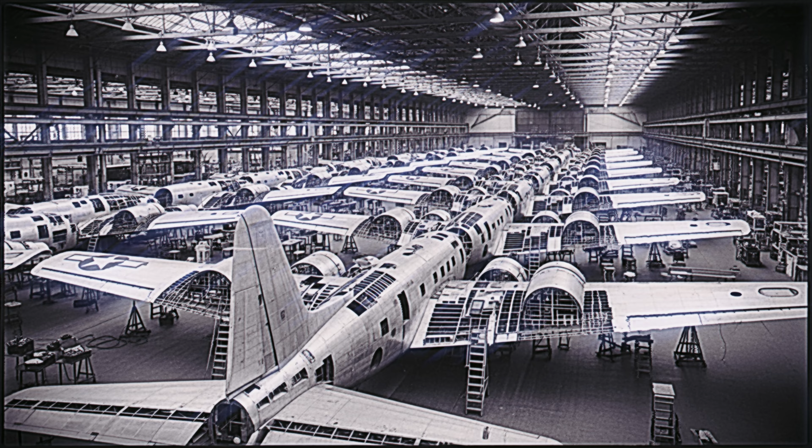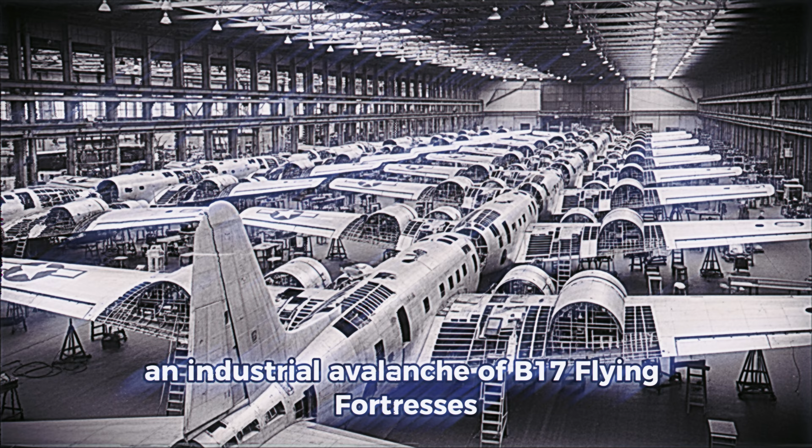In the first bitter weeks of 1942, Boeing's Plant 2 in Seattle was supposed to be a thunderstorm, an industrial avalanche of B-17 Flying Fortresses that would one day darken the skies over Nazi Germany. Instead, the massive assembly hall stood frozen in a suffocating stillness. 63 skeletal bombers, nothing but aluminum ribs and unfinished wings, sat motionless under the factory lights, each one a monument to a promise America was failing to keep.

The Army Air Forces had ordered 3,615 bombers for that year. By mid-January, Boeing had delivered 9, a single digit. General Henry Hap Arnold was not disappointed. He was incandescent. Behind closed doors, on January 15th, his fury seared through Boeing's executives like acid.

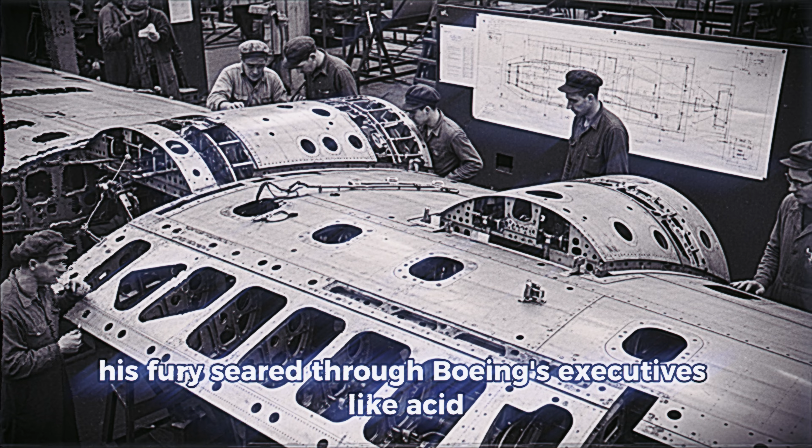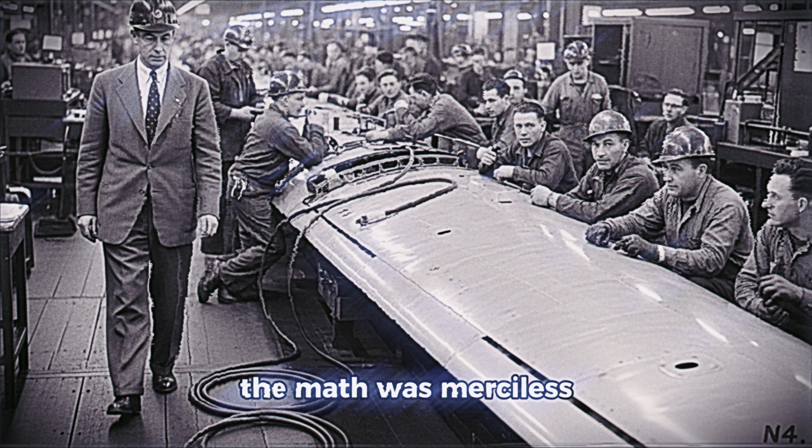Without a fleet of heavy bombers, there could be no strategic air campaign. Without that campaign, the ground war in Europe would devour American lives for years. Every day Boeing failed to deliver was another day the Third Reich gained ground. The math was merciless. And yet, the problem wasn't manpower.

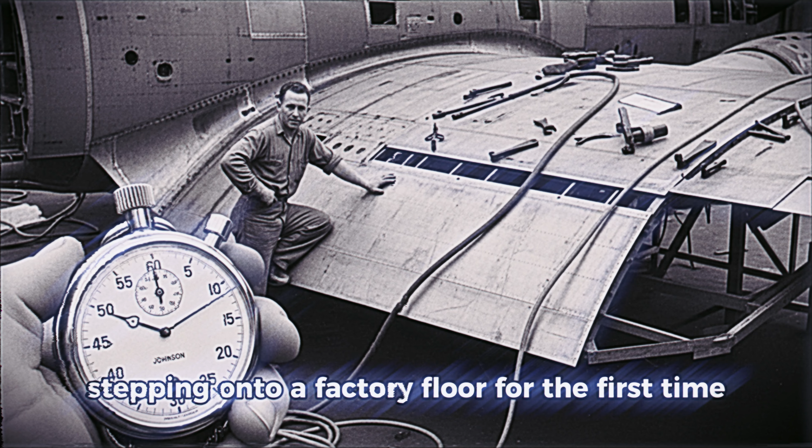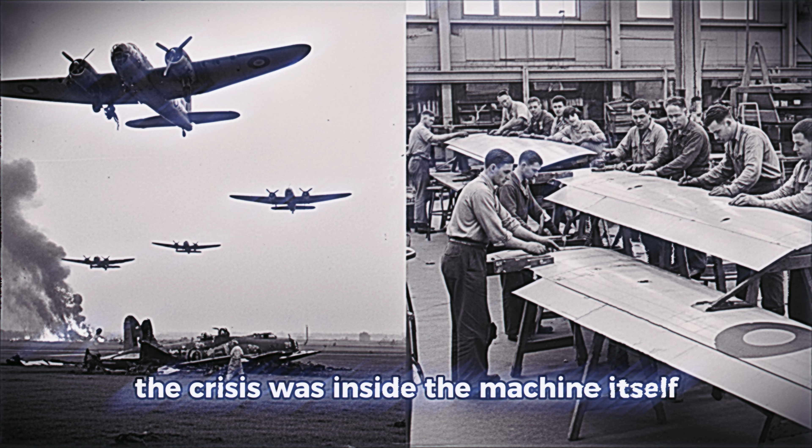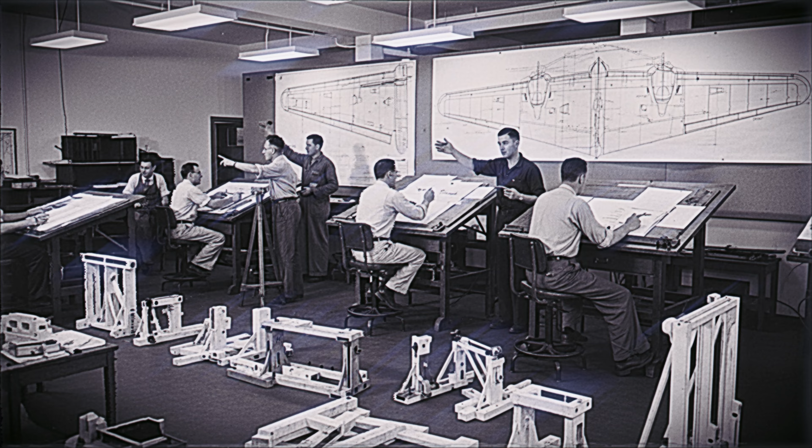Boeing had hired 30,000 workers in 6 months, many of them women stepping onto a factory floor for the first time. It wasn't materials. Mountains of aluminum from Alcoa sat waiting to be shaped. The crisis was inside the machine itself. The B-17 was too complex for the world that needed it. Each bomber was a 140,000-piece puzzle. Each wing demanded more than 12,000 rivets. The established methods of aircraft construction, methods perfectly suited for smaller, simpler planes, collapsed against this new reality.

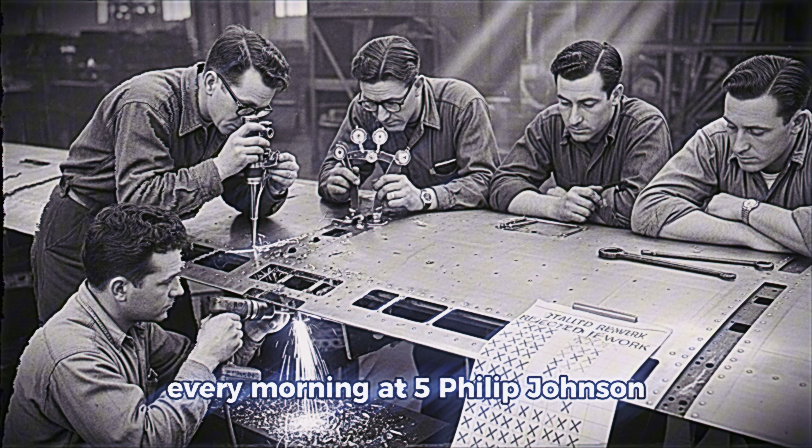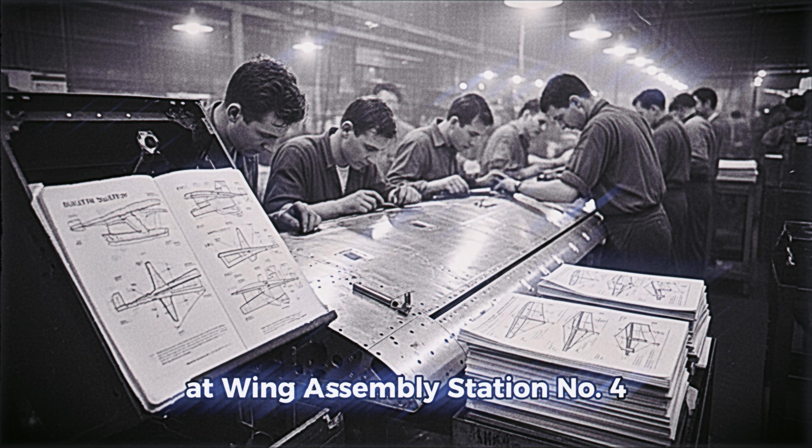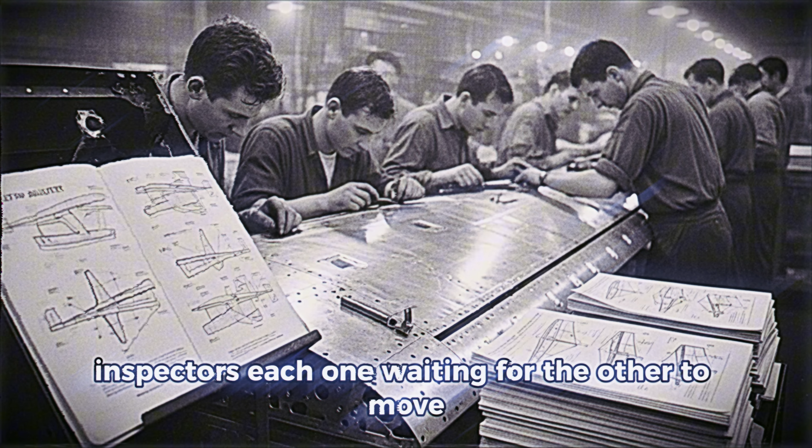Every morning at 5, Philip Johnson, Boeing's head of production, walked the line like a man pacing through a slow-motion catastrophe. At Wing Assembly Station number 4, 17 workers were packed shoulder to shoulder, stumbling over hoses, fighting for the same square foot of space. Riveters, buckers, inspectors, each one waiting for the other to move. A choreography of frustration, a ballet of wasted time. Johnson had timed it himself, more than 20 hours to finish a single wing.

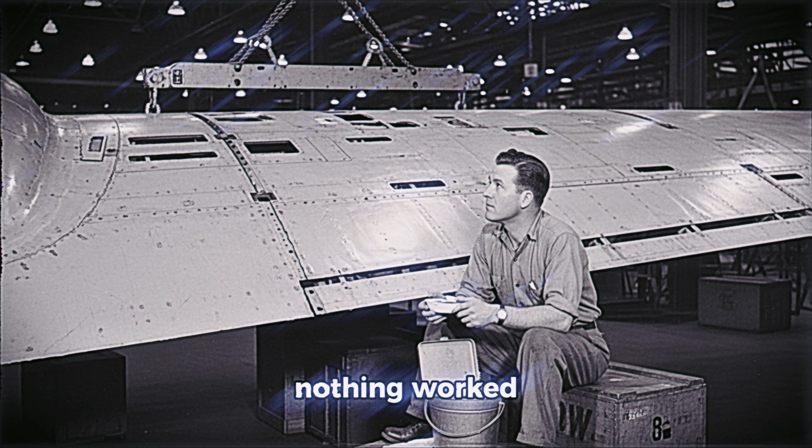Meanwhile, over Europe, the Royal Air Force was losing bombers faster than Boeing could build them. Every hour lost in Seattle meant another blackened crater in England, another Allied ship sunk in the Atlantic, another German factory untouched in the Ruhr. The paralysis wasn't just costing time, it was costing lives. Engineers tried everything: new access ports, custom jigs, smaller crews, bigger crews. Nothing worked. The bottleneck was baked into the wing's DNA.

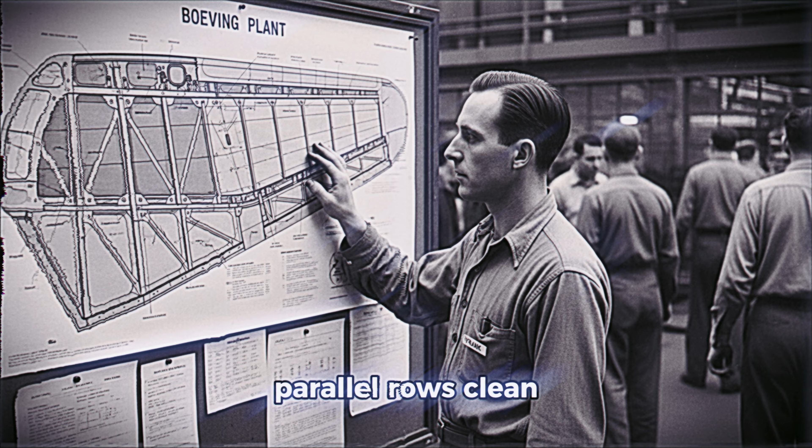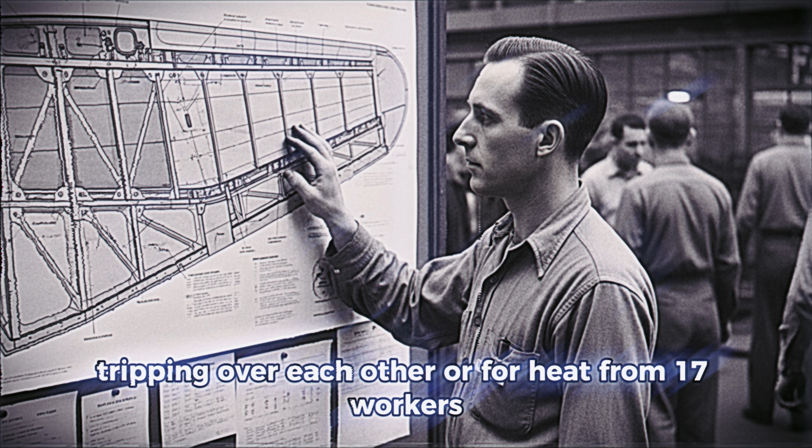The sacred blueprints demanded each rivet line be installed in perfect parallel rows. Clean, predictable, theoretical. But theory didn't account for human bodies tripping over each other, or for heat from 17 workers expanding the metal just enough to misalign thousands of holes. The engineering was flawless. The reality was chaos.

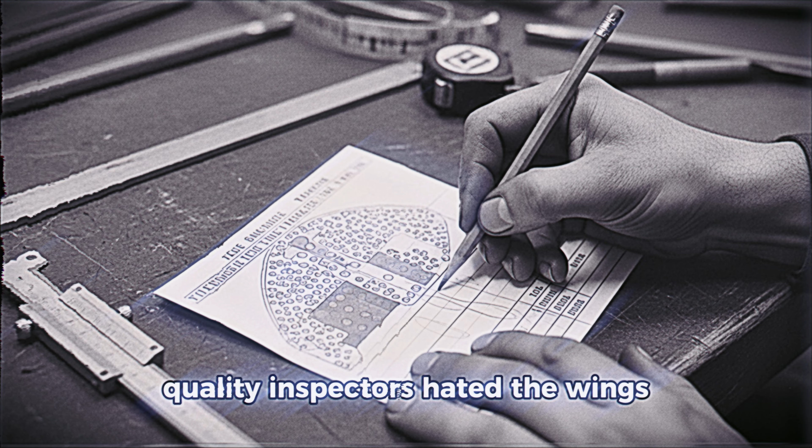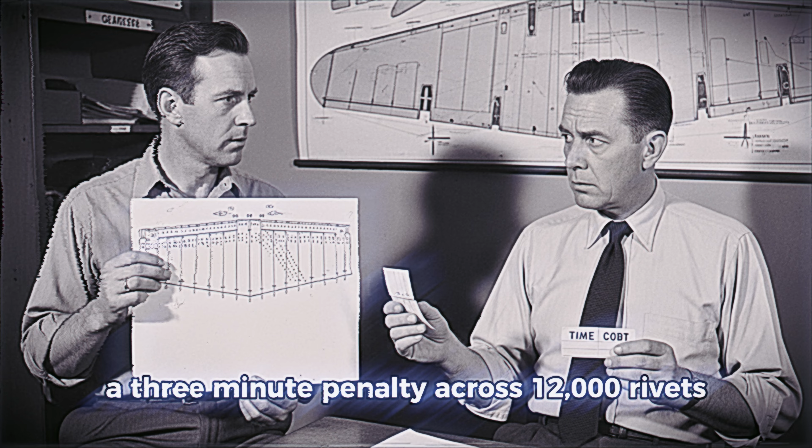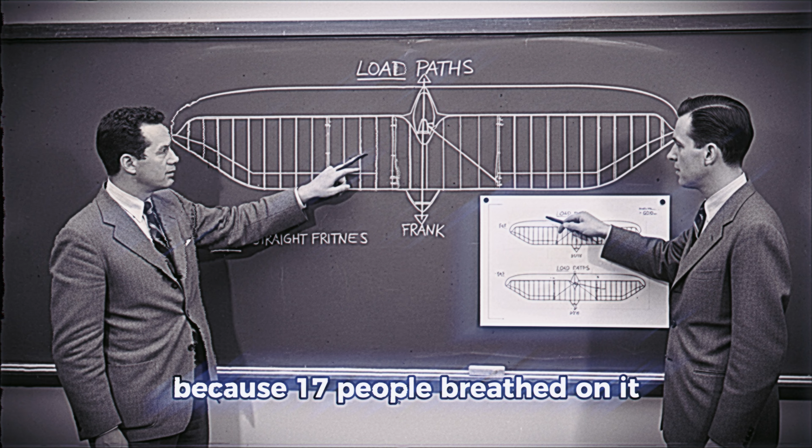Quality inspectors hated the wings. Every 10th rivet had to be checked with a borescope. If they found a flawed rivet, it meant drilling it out, a 3-minute penalty. Across 12,000 rivets, those minutes became wars. No manual mentioned what happened when the metal distorted because 17 people breathed on it for 20 consecutive hours. But that was the world they lived in.

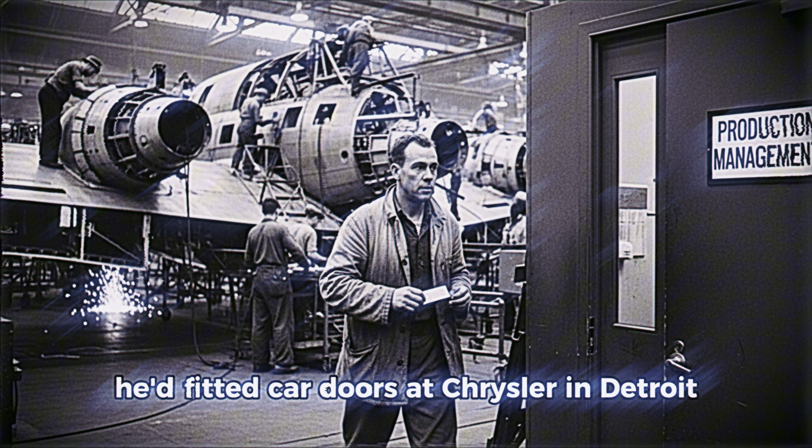And in that world worked a man named Frank Shamansky. He didn't look like someone destined to alter the trajectory of a global war. 5'7", 31 years old. Hands stained black from aluminum dust. Before Pearl Harbor, he'd fitted car doors at Chrysler in Detroit. The kind of repetitive work where your mind wanders, but your hands move like they've known the rhythm forever. Frank joined Boeing's swing shift, working from 4 in the afternoon to midnight.

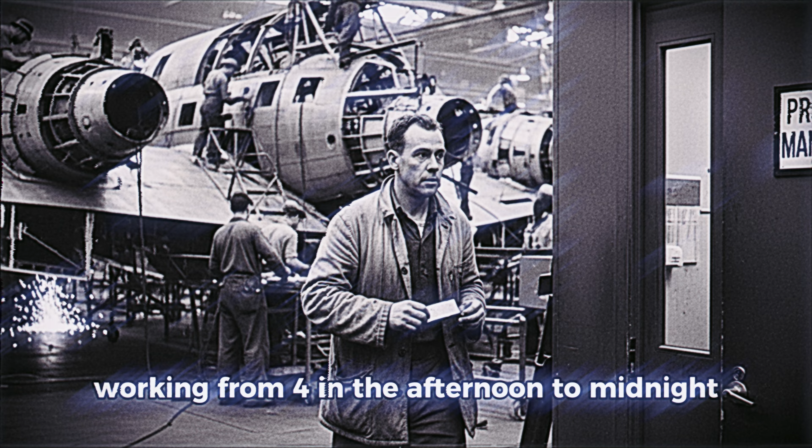And what separated him from the others wasn't speed. It was his gaze. Frank saw the whole system. He saw Jenkins stuck on row 3 because Patterson on row 2 was trapped behind quality control. He saw riveters losing minutes reconnecting hoses. He saw how human exhaustion was quietly sabotaging American air power.

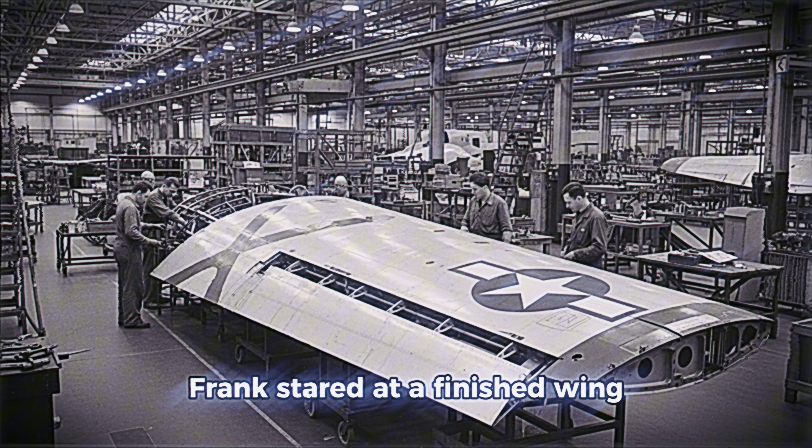On February 4th, while eating his sandwich on a crate, Frank stared at a finished wing being hoisted into place. The rivet rows were beautiful, mathematical, elegant. But his mind drifted back to Chrysler. Door panels weren't attached in straight lines. They were attached from multiple points at once, converging inward. It allowed workers to move in parallel, never crossing paths.

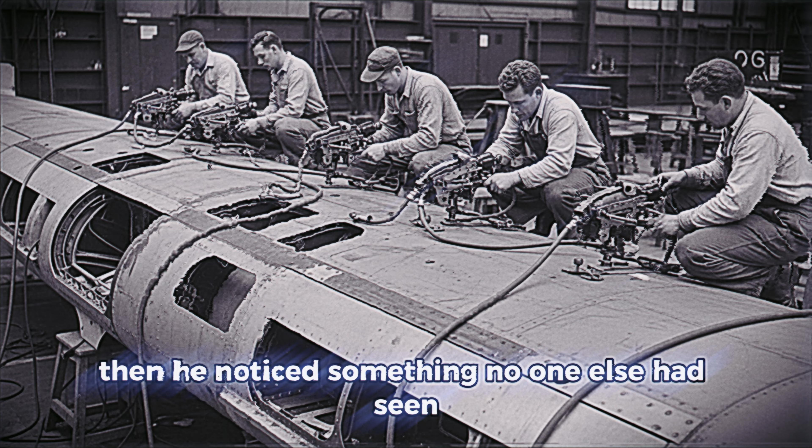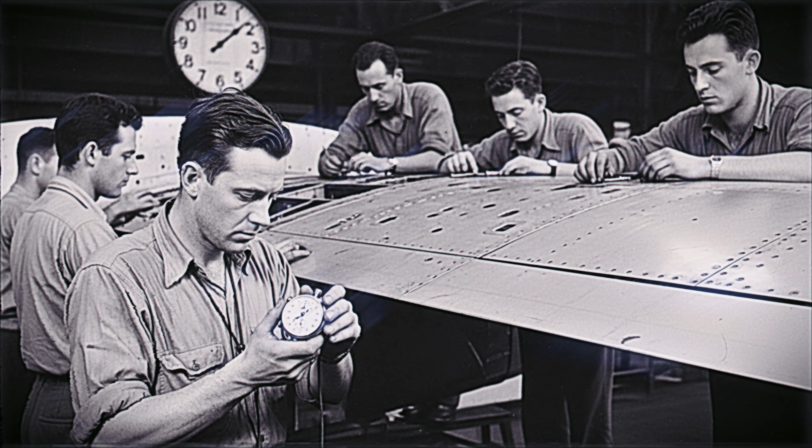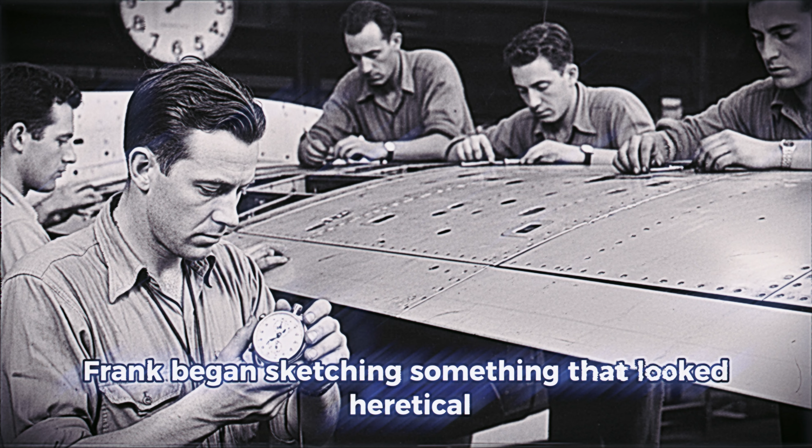He looked at the wing diagram pinned to the bulletin board. Then he noticed something no one else had seen. The wing wasn't a flat panel. It had ribs, hollows, access hatches, natural entry points, places where workers could operate without interfering with one another. That night, using the back of his time card, Frank began sketching something that looked heretical. Clusters of rivets around internal ribs, like constellations, with lines radiating outward instead of marching in rows. A pattern that would allow 5 workers to rivet simultaneously without ever touching the same space.

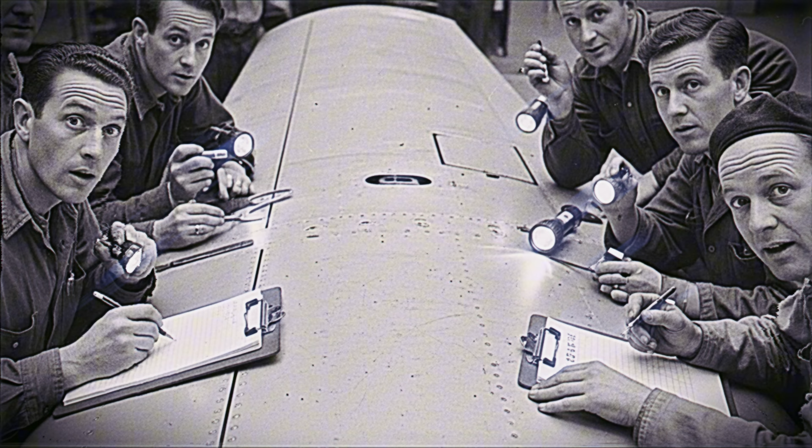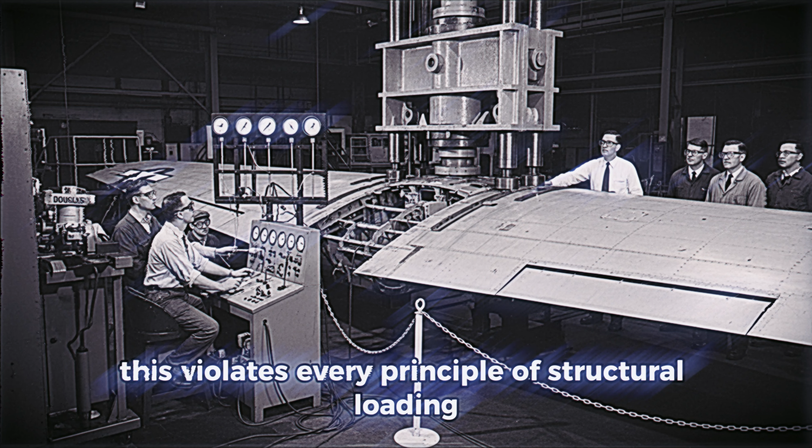A pattern based not on theory, but on the geography of the wing itself. The next week, he showed the sketch to his supervisor, Bill Hendricks. Hendricks stared at it for a long, hard minute. "This violates every principle of structural loading," he said. "This goes against everything in the textbooks."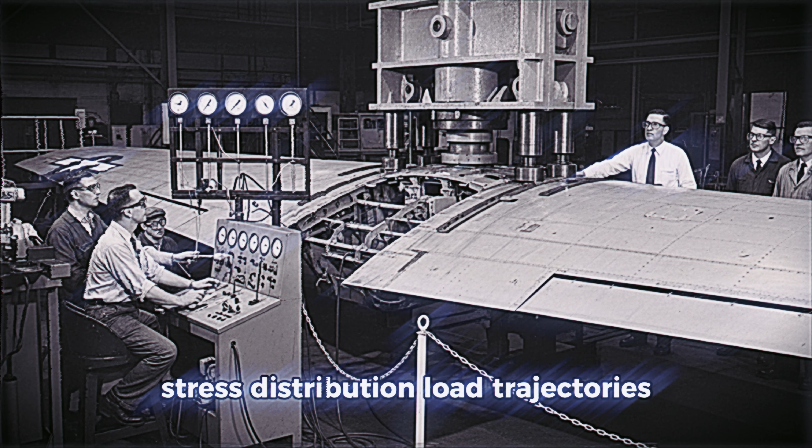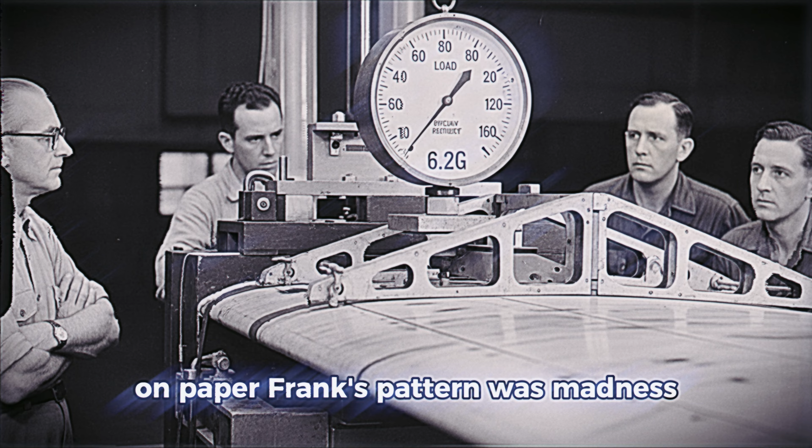He explained von Karman's theory, stress distribution, load trajectories, how the wing flexed in flight, how the rivet rows were positioned to counter invisible forces. On paper, Frank's pattern was madness. A wing built that way could shatter midair. Men could die. But Hendricks wasn't finished.

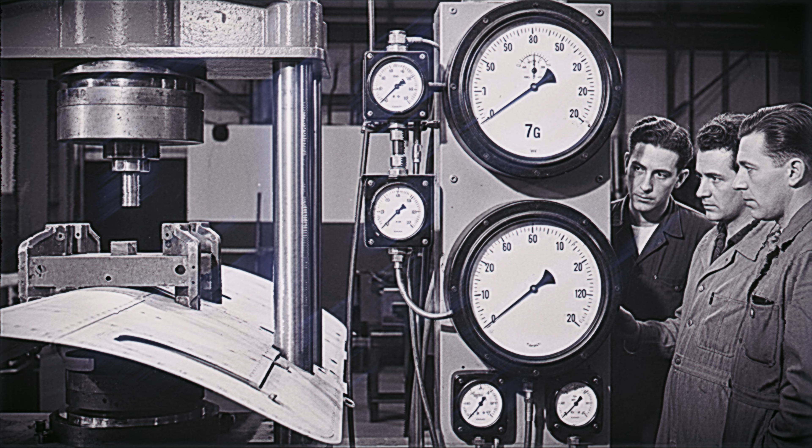"What if the perfect design still fails?" he asked quietly, "because we build it so slowly and so poorly that it never meets its theoretical strength? What if your pattern, though imperfect on paper, creates better rivets simply because the workers aren't exhausted?" It was the first time someone saw what Frank had seen.

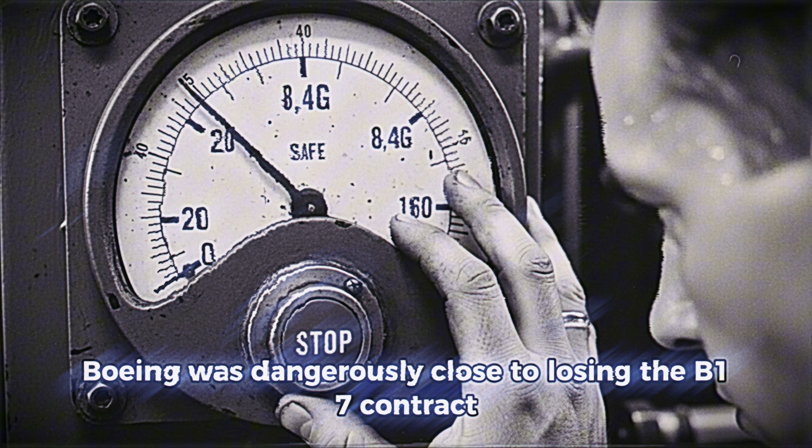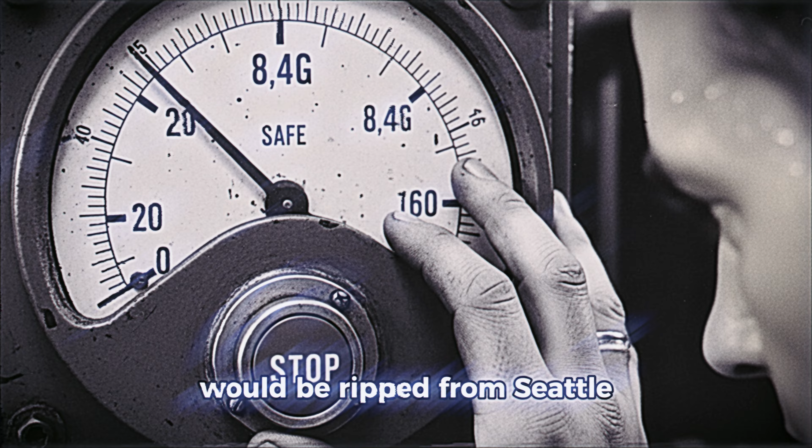Hendricks took the time card and went to a desperate man, Donald Douglas, assistant production manager. Douglas was weeks from being fired. Boeing was dangerously close to losing the B-17 contract to Consolidated's B-24. If Boeing didn't deliver a miracle by mid-March, the heart of the bomber program would be ripped from Seattle. So Douglas did the unthinkable. He authorized a secret experiment.

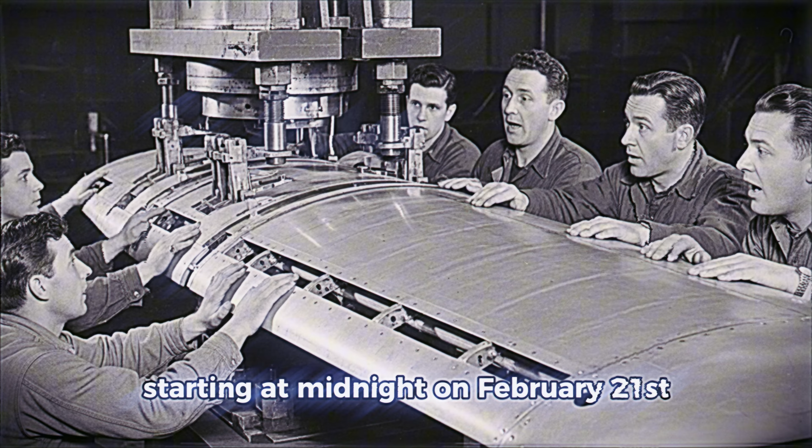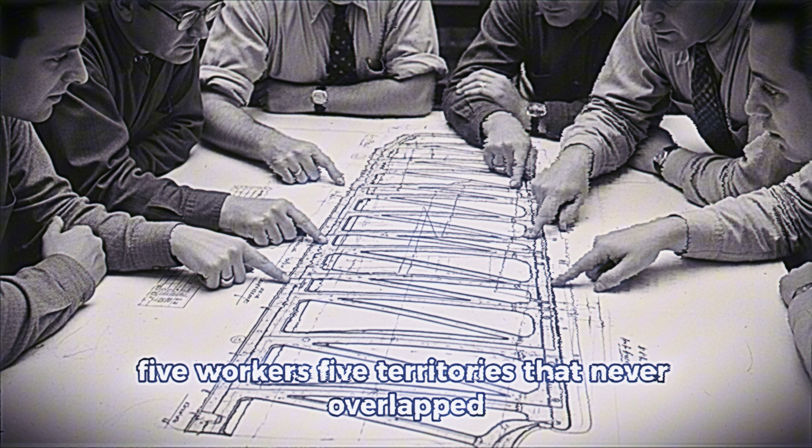On the graveyard shift, starting at midnight on February 21st, they smuggled in a scrapped wing section, damaged beyond use. Perfect for a test that could end careers. Frank refined his pattern, color-coding zones: red, blue, yellow, green, white. 5 workers. 5 territories that never overlapped. The test started at 12:14 a.m.

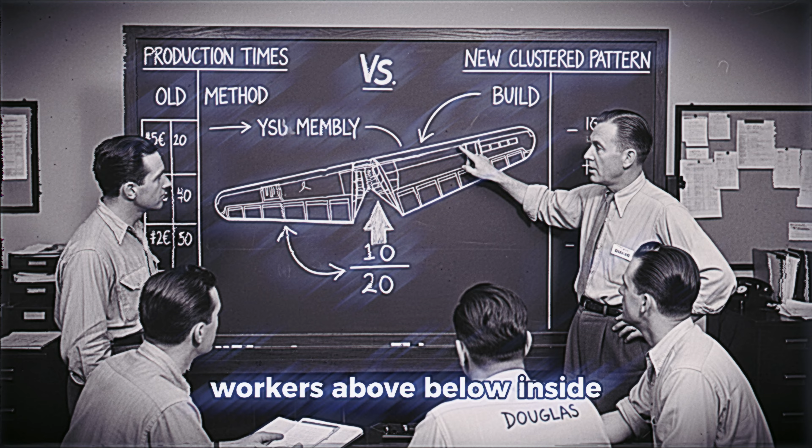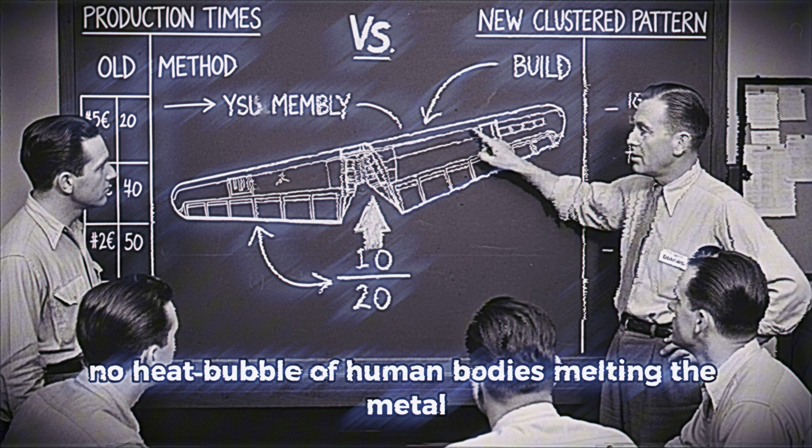If the old method dictated order, this new one looked like chaos. Workers above, below, inside, outside. A storm of rivet guns hammering the wing from all angles. No waiting, no tangling hoses. No heat bubble of human bodies melting the metal. After 2 hours, the wing was nearly finished. Douglas's hands shook as he checked his stopwatch. At 2:21 a.m., just 127 minutes after they began, the final rivet locked into place.

Quality inspection was brutal. They expected catastrophe. Instead, they found 11 defects. The average wing had 140. But the wing still needed to survive the violence of combat. So Douglas broke protocol again. At 3:30 a.m., he ordered the structural test facility to prepare for an emergency load test. He lied, told them it was routine.

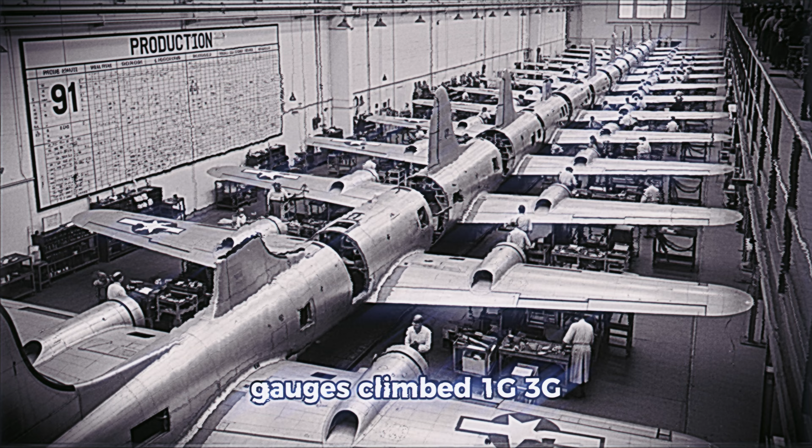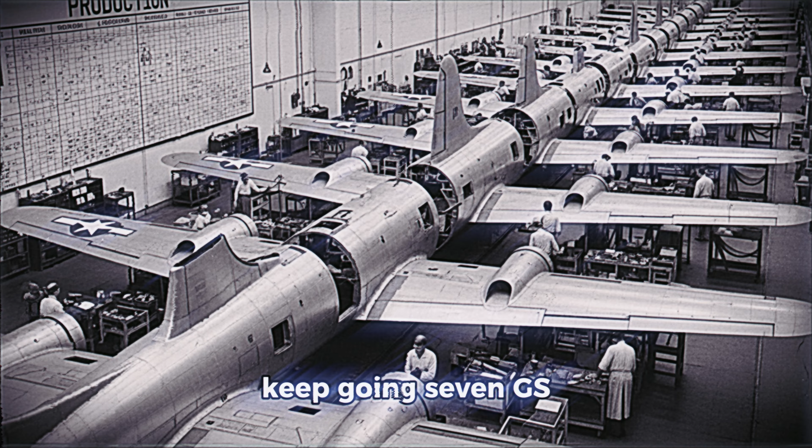At 4:15, they mounted the wing onto the hydraulic press. The machine roared to life. Gauges climbed. 1G, 3G, 6.2G, the Army requirement. The wing held. Douglas swallowed. Keep going. 7Gs, 8Gs, 8.4. It still held. They stopped the test, not because the wing was failing, but because the machine was. The wing returned to its neutral position without a single bend.

No one expected this. Not the engineers, not the supervisors, not the man who drew the pattern. By accident, or perhaps by genius, Frank's clustered rivet pattern aligned perfectly with the wing's internal ribs, channeling stress through its strongest bones. It was stronger than the engineer-approved design. Stronger and 16 times faster to build.

At 6 that morning, Douglas went straight to the home of James Murray, Boeing's vice president of operations. Murray arrived at the plant, saw the data, and understood instantly. This was the miracle they needed. Over the screams of the engineering department, he ordered the method into full production, effective immediately. Frank Shamansky received a new title and a $40 a week raise. It wasn't much, but history would remember what happened next.

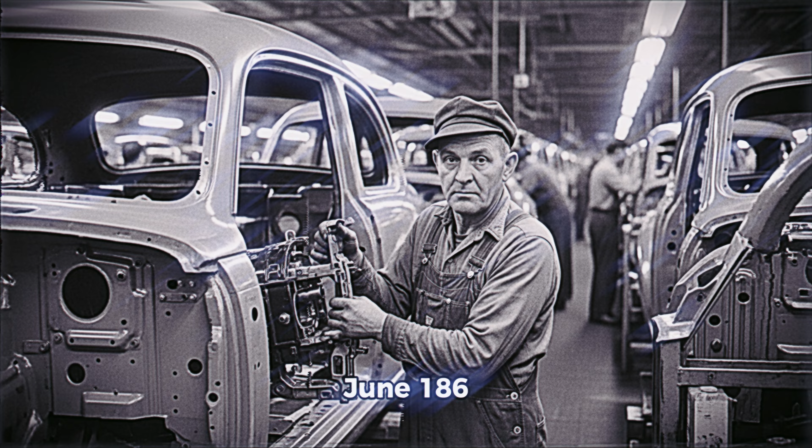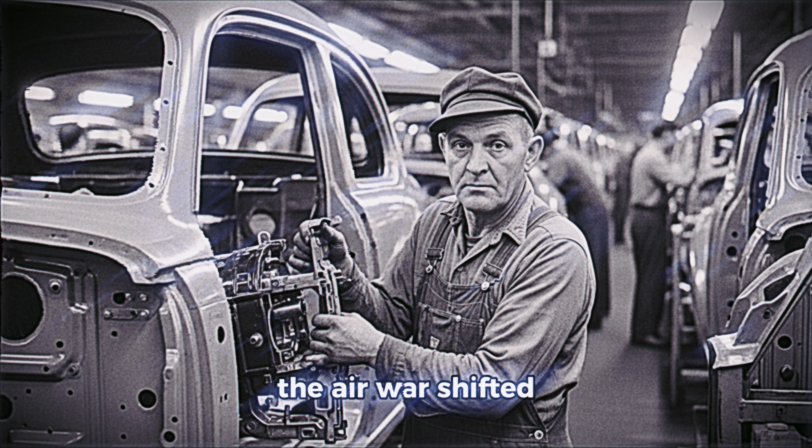In March, Boeing delivered 47 B-17s. In April, 91. June, 186. July, 284. September, 362 bombers, more than the entire previous year. The air war shifted. The 8th Air Force could now send 100 bomber raids, then 300, then 500. Interlocking defensive fire tore apart the Luftwaffe. The raids that destroyed German ball-bearing production, the turning point of the air war, required 376 B-17s. Without Frank's pattern, those planes would never have existed.

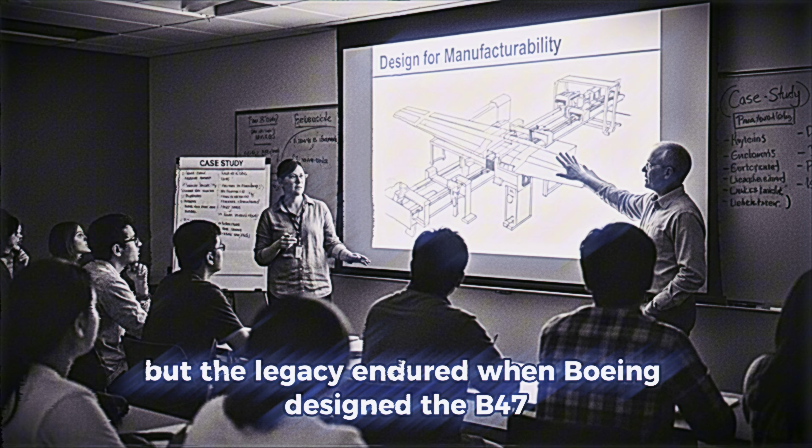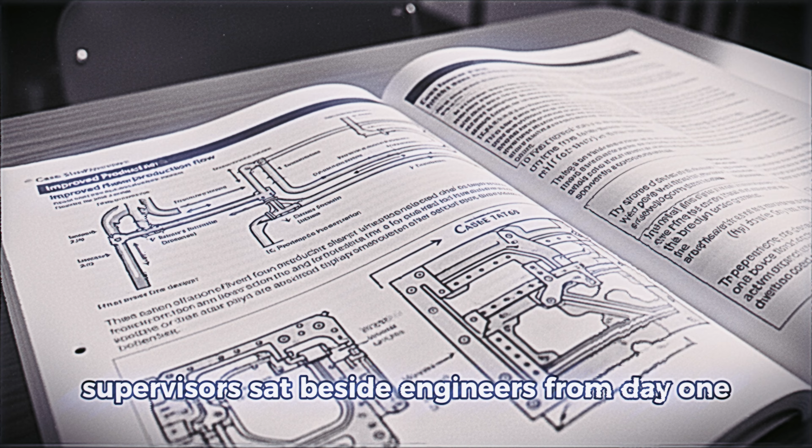After the war, Frank's name faded. His specialist role was eliminated. He returned to Detroit, worked at Ford, died in 1971, likely unaware that his pencil sketch on a time card had helped change the shape of the world. But the legacy endured. When Boeing designed the B-47, they began not with theory, but by consulting the workers on the line. When they designed the 707, supervisors sat beside engineers from day one.

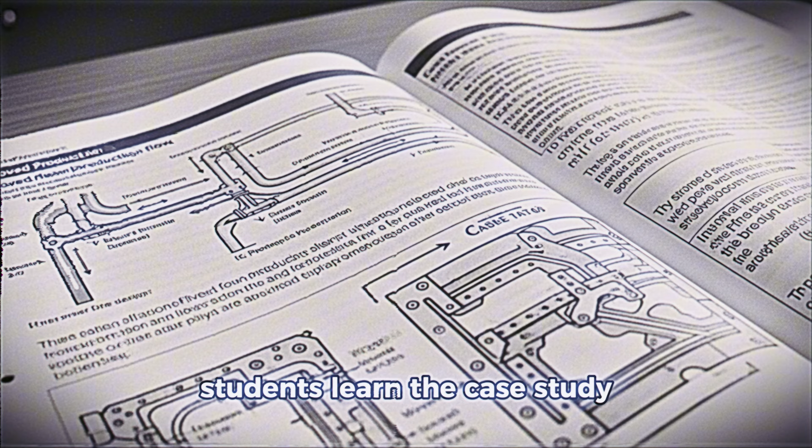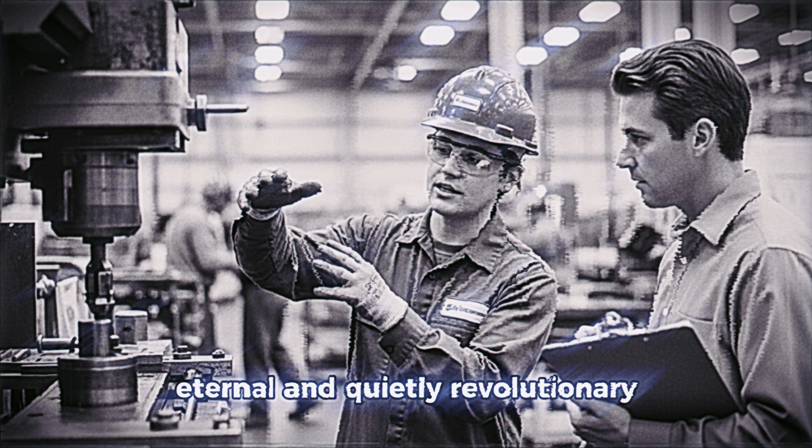Today, the principle is universal. They call it design for manufacturability. Students learn the case study, they learn the innovation, but not the name. They don't learn about Frank. Yet the lesson he left behind is universal, eternal, and quietly revolutionary. The person doing the work often understands it more profoundly than the person designing it. Smart organizations listen. Others keep building wings in 20 hours and wonder why the war is being lost.